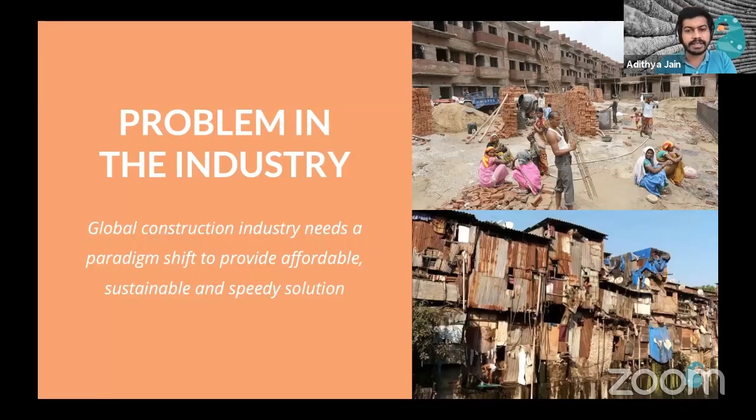So if you look at, let's say, the manufacturing sector versus the construction sector, I'll come to that. Manufacturing has gone way ahead of the construction sector in terms of what it is capable of delivering, but construction is far away from achieving that. And to specifically talk about India and the problem that we currently face in India, we have a housing shortage of 49 million houses, or 4.9 crores, and it is expected to expand, and I'm talking about the current projections right now. 100 million houses by 2030 is the projected requirement.

There is also a case where because of migration, that is, India is undergoing a very fast urbanization process, and because of that, people require a different home, or a home additional to whatever they have. So that demand is also going to hit the Indian housing market quite soon. And if you look at the global requirement, there is a requirement for 1.6 billion better housing for the people across the world. So these are not homeless people essentially, but these are people who require a better shelter than what they currently have.

And one of the biggest problems that the current construction industry has is with respect to the reliance on human skill. So we have a huge problem, and we have a very limited populace who have the skill to deliver the solution. And that is a huge problem. And there is massive wastage within the construction industry, and it is one of the biggest contributors to global warming as well. So there is not only a requirement to deliver housing, but there is a requirement to deliver it in a sustainable manner.

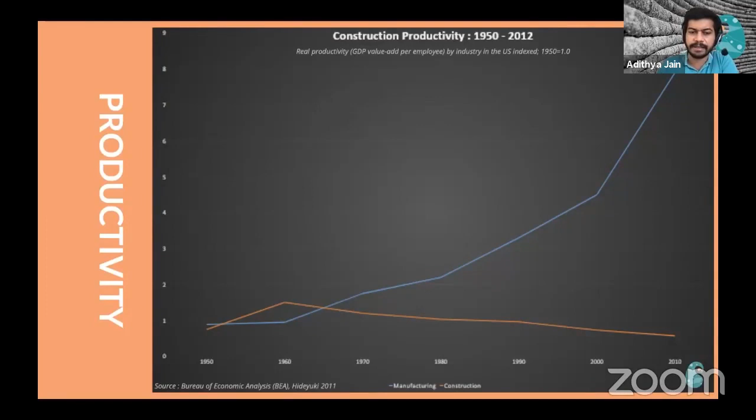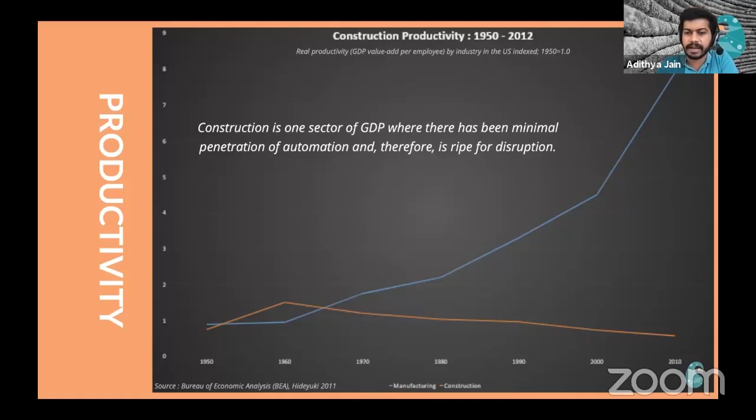So these are the problems that we are trying to resolve, and this is just a chart which is very self-explanatory. Just for the United States, the kind of difference that we see between 1960 and now with respect to productivity that has been achieved in manufacturing versus productivity that has been achieved in the construction sector is really massive. And this is what we aim to resolve through bringing digital construction solutions.

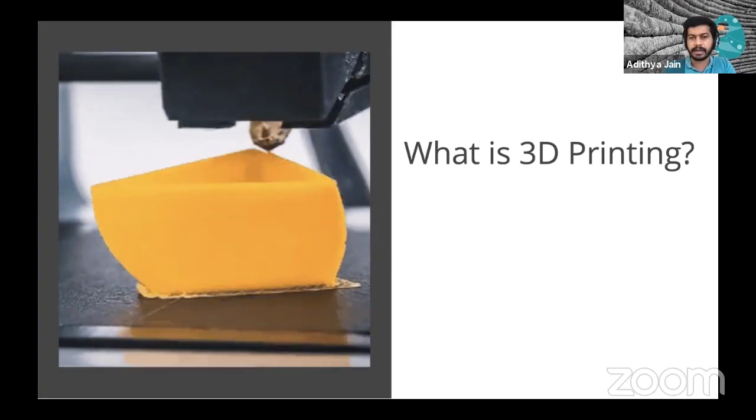So I want to start with the very basics, 3D printing, what it is, and what is the fundamental principle of this technology. 3D printing is a technology that has existed since about the 1980s onwards. Fundamentally, it is a technology where you deposit a material. It could be any material, polymer, concrete, soil. The material is deposited layer by layer on top of each other to create any specific shape. What you see here on the screen is a polymer material being deposited by a small 3D printer to create a basic shape. In formal parlance, that is in the scientific world, 3D printing is called additive manufacturing. And additive manufacturing essentially means add materials rather than subtract materials to create a component.

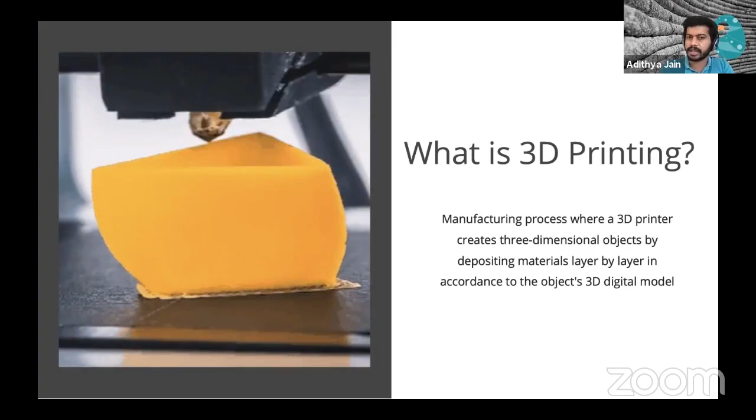The other aspect of 3D printing is it's a completely digital technology. It's a completely automated technology. So all we have to do is put a digital file into the 3D printer, and the printer can print the element for it. So I'll start with the basic requirements for enabling 3D printing. First, of course, is the machine, that is the 3D printer itself.

The type of 3D printer that is used really varies. People might be surprised to know that there are 27 to 35 different types of 3D printing technologies in the world. And what is essentially used for construction primarily is what is called extrusion 3D printing. Even within the construction space, there are a lot of variations in the technology that is used. So the machine could be very different depending on what type of 3D printing is actually being carried out.

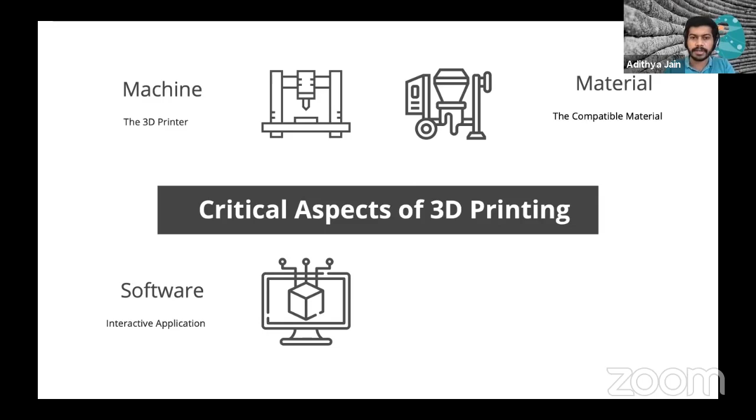Then you require a customized material. What you saw in the previous slide is a polymer material being 3D printed. Here in the construction industry, you have a variation of concrete or a geopolymer or even soil being used for large scale construction. So you require a compatible material for that particular application. Then you require the software. 3D printing, as I mentioned, is a completely digital technology, and hence you require a 3D file which has to be uploaded into the 3D printer for the process to take place.

So you require a software interface, and the software does a process called slicing, where the 3D file is taken, it is divided into, let's say, thousands of layers, and each layer is printed one by one. That is why it is called additive manufacturing, because we print each one of the layers one by one. And the last but very important process which makes this technology possible is the printing strategy.

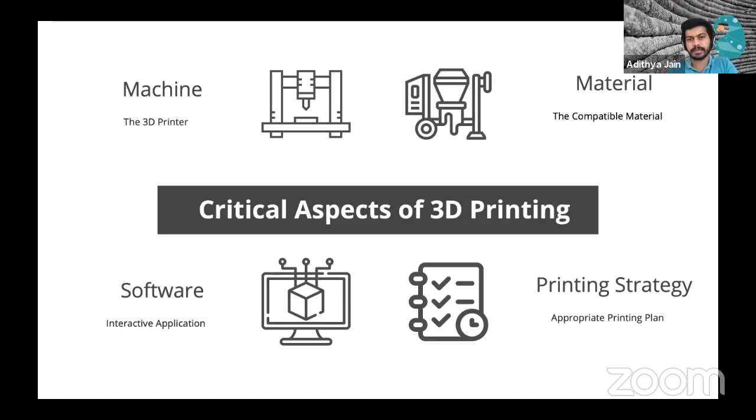For each and every application, we have to adopt a very different printing strategy. You might want a simple cup 3D printed using a polymer. That requires a very specific printing strategy, versus you might require a house 3D printed that requires a completely different approach. So these are the 4 elements that make up this technology matrix, and this is what makes 3D printing possible.

So I'll take you through the various processes that are involved in making, let's say, a house using a 3D printer. First you have to make a 3D model of the house, and there is a specific file format which is compatible for 3D printing. So you have to get the file in that particular file format, and then you have to upload that file into the 3D printer.

And then you have to make the concrete material available. So there is a specific type of concrete that we use for 3D printing within our solution. So not all types of concrete can be used. And people are also developing other types of material for 3D printing as well. Soil has been used in various places. There is also another material called geopolymer. So there are other material options, but primarily people use concrete.

And then you have the printing process where you 3D print either the elements or you directly 3D print the final structure on the construction site. So based on how that process is carried out, there are 2 different approaches. One is called off-site 3D printing, where you 3D print the elements of the house near a construction site and then transport the elements to the final construction site. And then you have on-site 3D printing, where you directly 3D print the structure on the final construction site.

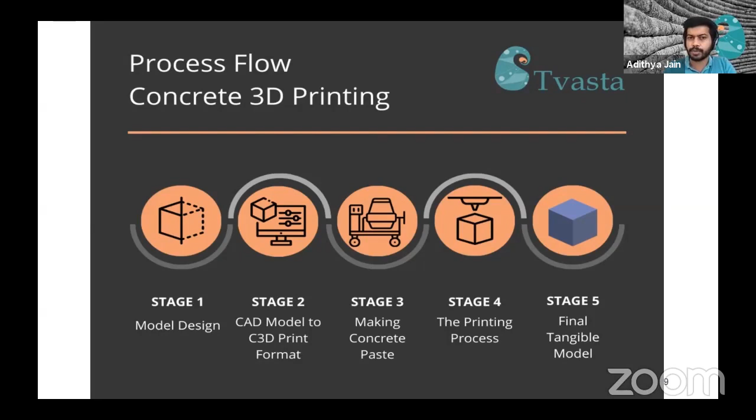And then you have the final structure, and you might have to undertake some finishing processes to get it into the shape you want. So what we do in this area is we develop the entire solution. We have developed the 3D printer, we have the material, we have the software, and we also have a printing strategy to enable 3D printing. So we develop the entire technology package. We sell 3D printers, and we also enable people to do 3D printing services using our machines. So we have started working in the affordable housing area. There are a few more applications of 3D printing.

And the real advantage of 3D printing, especially in the construction industry, is the level of customization that it offers. So every single house, especially in a country like India, is different from each other. It depends on the land plot. It depends on the user's requirement. It depends on the climate of that particular area. So normal construction technologies, or at least the construction technologies that have come up in the past few years, have not been able to customize it according to the user and according to the requirements. But with 3D printing, you can do that because all that you have to vary or change is the 3D file, and you can get a different output.

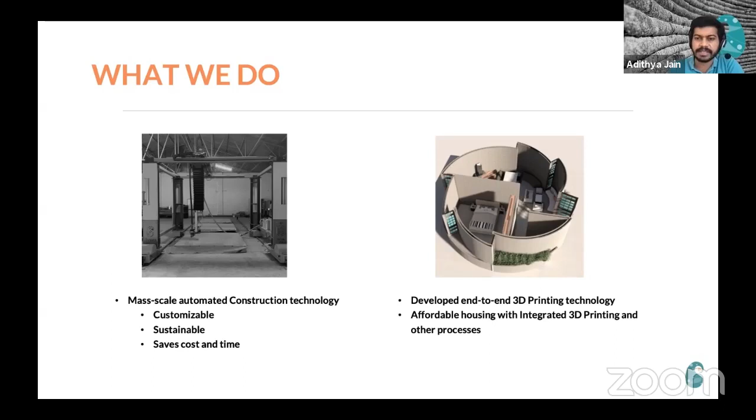And we have also been focusing on sustainability and time and cost. I'll get to that in a minute. But customizability is one of the key aspects of 3D printing. So we call this technology a mass customization enabler. So you had mass production until now after the Industrial Revolution, but with 3D printing, what we are really doing is mass customization. So affordability of the solution is a key problem that we are trying to solve. So we want to reduce costs of construction using 3D printing, and we want to do it not just for massive construction projects, but even when the project size is 1 house or 2 houses or 5 houses, etc. So affordability is a key parameter.

And we want to make our solution sustainable as well, because construction contributes to a very large degree towards global warming. And we do this by reducing the amount of material used. So concrete is material that is harmful to the environment. So we try to reduce the amount of concrete being used. And we also try to ensure that the house is designed in such a manner that it consumes much lesser energy than a conventional house over its lifetime. So that is a key aspect that we currently work on. Productivity of laborers who work using our 3D printing technology is a key aspect. We want to ensure that maximum construction happens with minimal involvement of people. So that's one of the key elements.

And another key delivery point that we have is to try and provide urban quality construction in rural areas. So if you have traveled across India, you would see that the quality of construction really drops beyond tier 3, tier 4 cities. And this is because one, the contractors in those areas are not trained enough to carry out construction in a particular manner. And also there are constraints with respect to financing. So with our technology, we want to enable it to go into rural areas, deliver construction in areas where even electricity is not available, and do it in a good quality sort of a setting. So that's something that we work on.

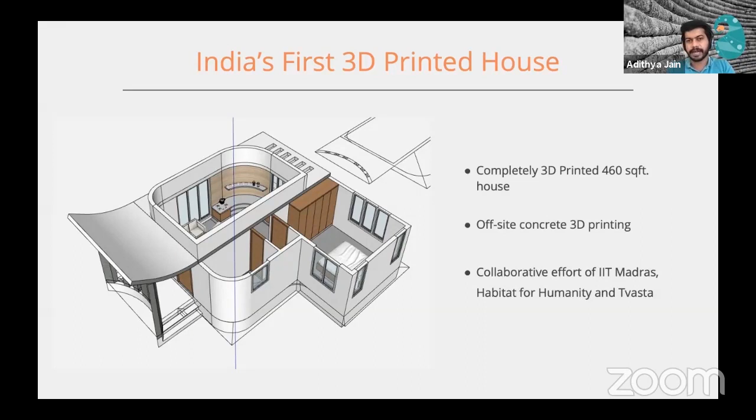This was done using a technology called offsite 3D printing. This is something where we have a 3D printer hosted near the construction site. We 3D print the elements and then bring the elements to the final construction site separately. And Habitat supported us through financing the project, and also we had support from IIT Madras to execute this. So I'll just show you a brief video of how this process actually happened.

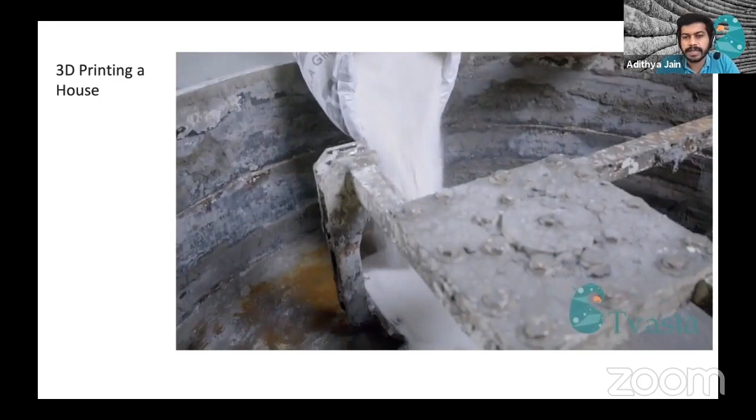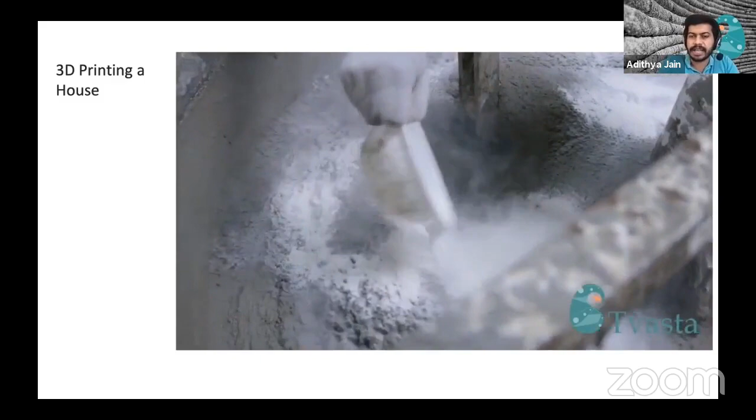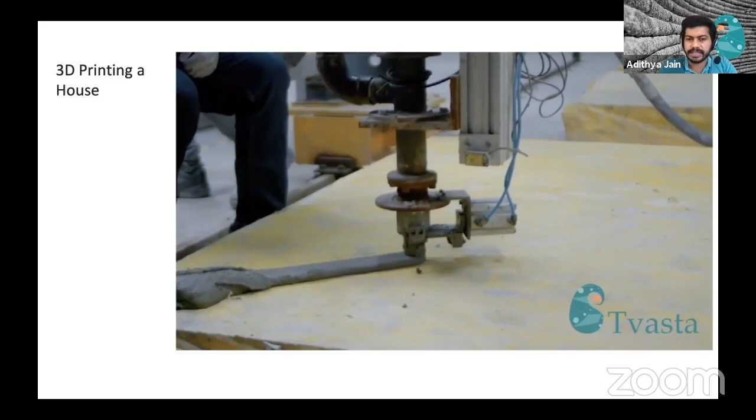So first we start with the material. So we currently batch manufacture the material. We don't produce more than 2 tons in a particular day. So this is a special type of concrete that we have developed. As I said, normal concrete cannot be used for construction 3D printing. So this particular type of concrete has several properties, such as when you see the concrete, you know that it's different from the concrete that you have normally observed.

This concrete can retain its shape without any support. So normal concrete, you might have seen, it flows like a liquid, and usually you require a mold to hold it in place. But this particular type of concrete, once it comes out of the 3D printer, it basically retains the shape in which it is deposited, so we can build on top of it.

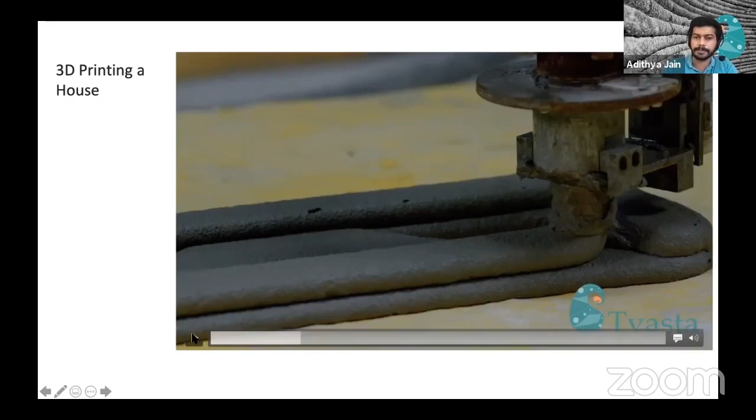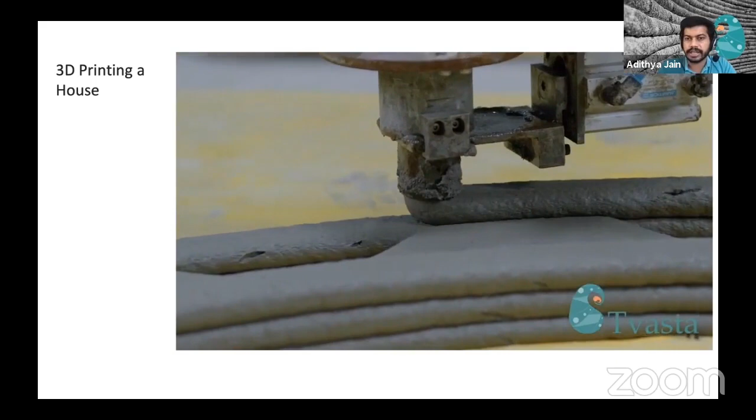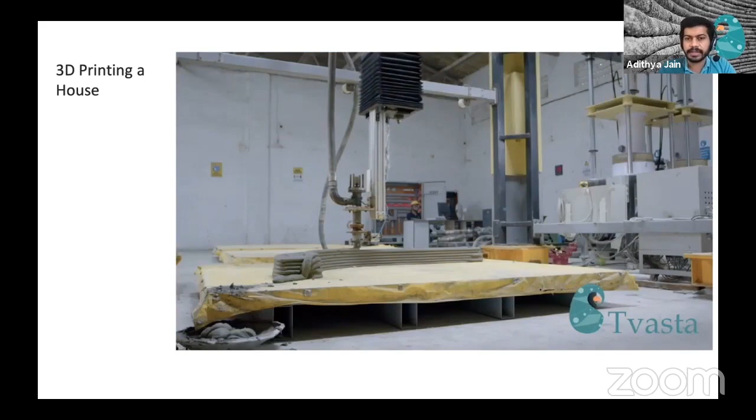So this is the 3D printing process. The design for this particular element or structure has already been fed into the 3D printer. So the 3D printer is going around depositing material in the shape that it has been asked to. So this is a very large scale 3D printer. You'll see an image right after this, just to give you a sense of proportion.

So you can see that we do not require 100% solid infill to 3D print a particular structure. We 3D print a wall element or a structure with much lesser material than what would be done for a conventional structure. So we save a lot of material, and also it becomes much easier to integrate plumbing elements, electrical conduits, sewage elements into the structure at a later point in time.

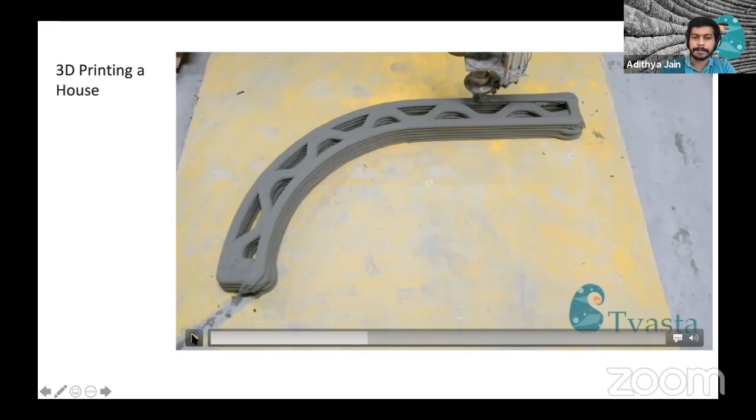So this is the large scale 3D printer, and this is the 3D printing process. You can see how big the 3D printer is in comparison with the people who are standing next to it. You might have seen 3D printers in laboratories or in prototyping shops, etc. Those are very small scale 3D printers. These 3D printers which are used for construction are very large and usually as big as a house or even bigger. And they work in a factory setting.

So if you have offsite 3D printing as we have now, here the 3D printer is hosted within a factory, and then you 3D print these elements, and then these elements are moved into the construction site. So the 3D printer here is a gantry type 3D printer, and hence it's bigger than the elements which are being built. You can also see that each of the elements that are being built are different in shape and size. So this, as I mentioned, is one of the key advantages of the 3D printing process.

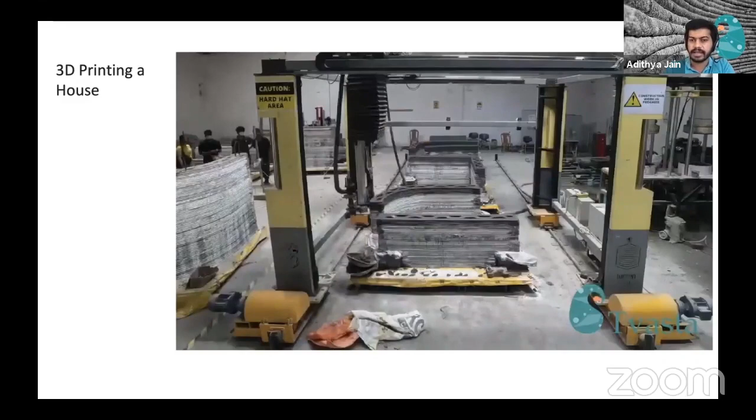We can customize the shape of the structure as and when necessary. So if we want to build a very unique structure, and most of the structures are unique in their own ways, it is very easy to do it using this process.

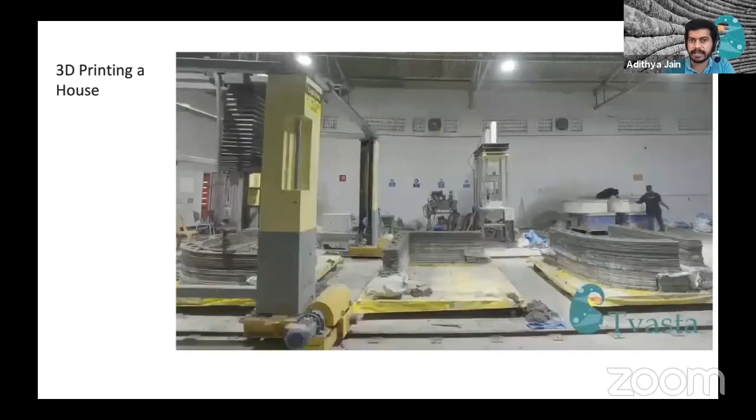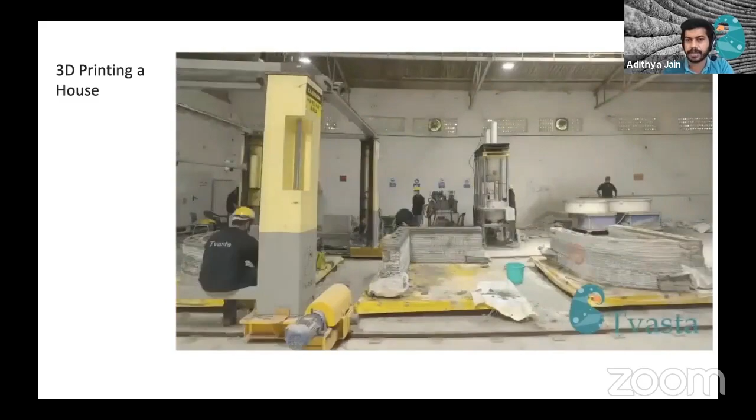So as I mentioned, we run it like a production shop. So the printing never stops, ideally. We run 2 shifts at this point of time, but we are planning to run 3 moving forward. So basically when one element is being printed, you have something else happening on the other element, and then you keep shuttling between these.

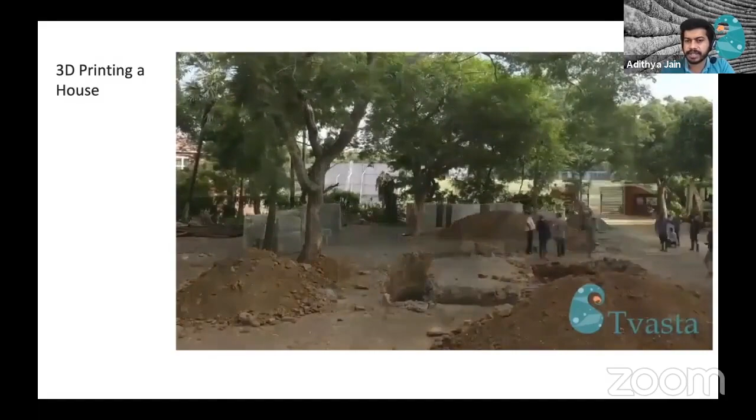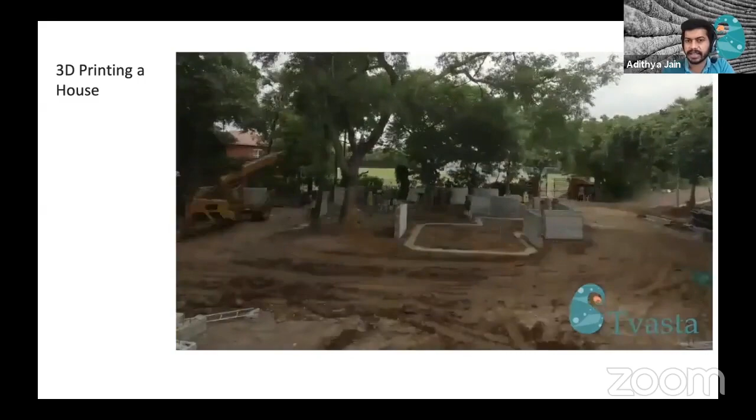So once all the elements have been printed, they are brought to the construction site. And for this particular project, we did not 3D print the foundation, but moving forward, that is something that is possible. The foundation, of course, depends on the type of soil and the construction site that you have, also on the structure that you want to build.

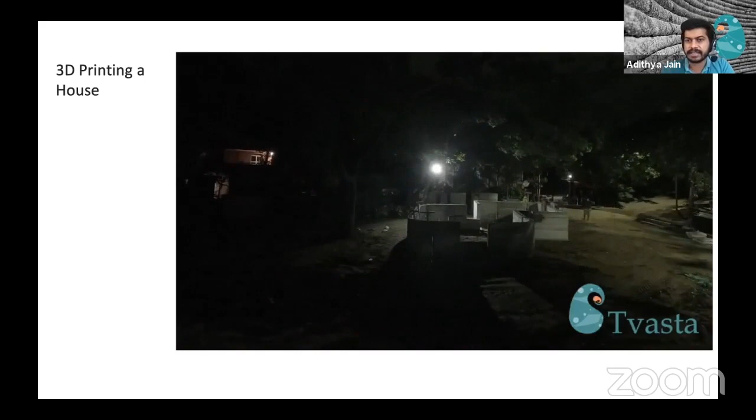Once the elements are printed, it takes a very limited period of time to actually get it assembled. So it takes us, at this point of time, 2 to 3 days to assemble the structure once everything has been printed.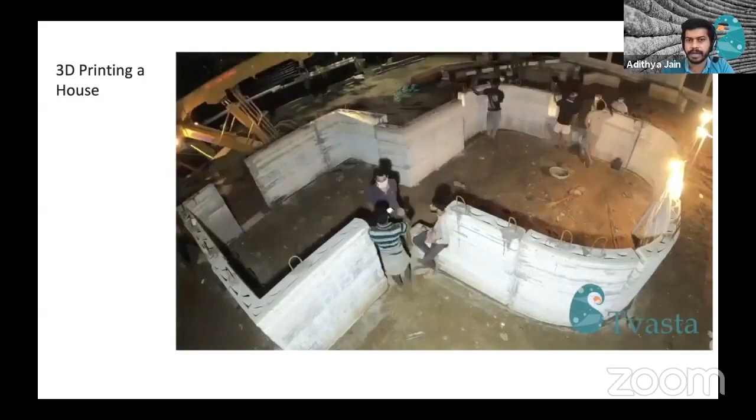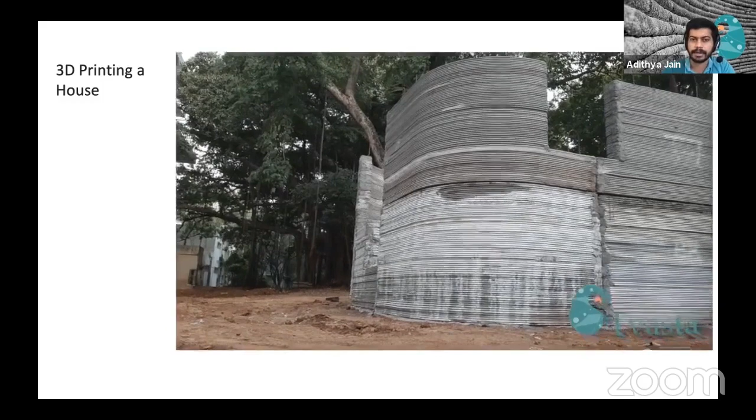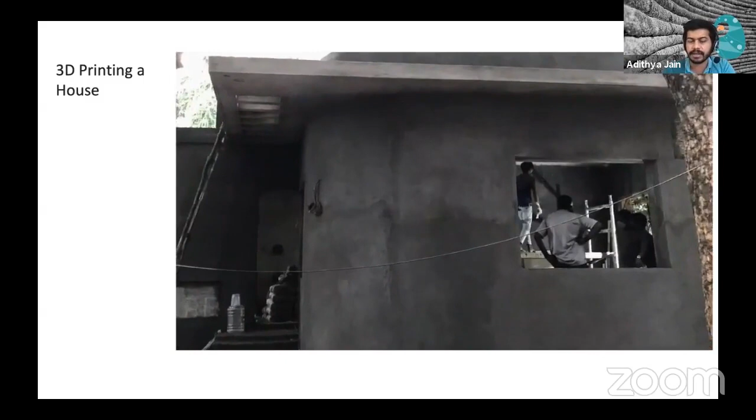And for this particular project, we took a little longer because we did it in the middle of COVID. So we had to sort of stop the process, and then we had restrictions to get into the place. So lockdown also happened. So we took a little bit of time, but currently we are capable of printing a structure like this within 5 days and assembling it within another 2 to 3 days. But moving forward, we want to print this entire structure within 3 days and then finish it within a week. So that's the target that we have set for ourselves.

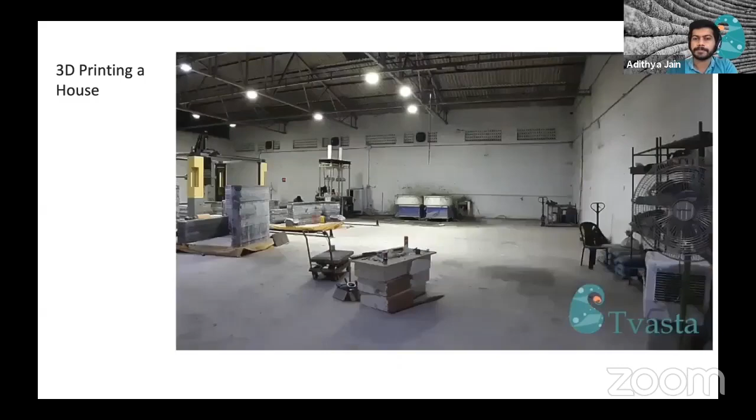So that's the finished house. So one of the key advantages of this is that the house which is printed does not feel or look different from a conventional house at all. It can look exactly like a conventional structure. So this is the final 3D printed house.

And one of the disadvantages of other construction technologies has been that the houses look and feel different from conventional so-called Pakka structures, because sometimes the materials used are such that the houses feel hollow. Sometimes when gypsum or other materials are used, the look and feel of the structure, especially in terms of the structural strength, feels different, although the quality might not be lower.

So consumer acceptance of a new construction technology is a very critical thing, and that's something that we have worked on. And it is critical because for most of the consumers, a house is the single largest asset that they will own in their lifetimes. And hence they want it to be strong, they want it to be perfect to the extent possible. And hence they are very touchy about it. And hence we have tried to put a lot of effort to ensure that a 3D printed house looks exactly like a conventionally built house.

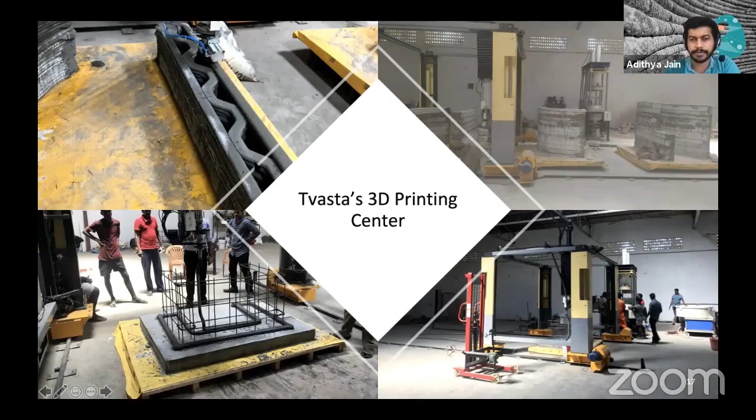So these are a few images during the construction process. We integrate reinforcements into the 3D printed house. So that's also possible. We can do it either before the 3D printing process begins or after the 3D printing process ends. As you can see, there are spaces available within the 3D printed structure to insert reinforcements. And the shapes of the various structures can be different, as I mentioned. So these are images of the 3D printer which we use.

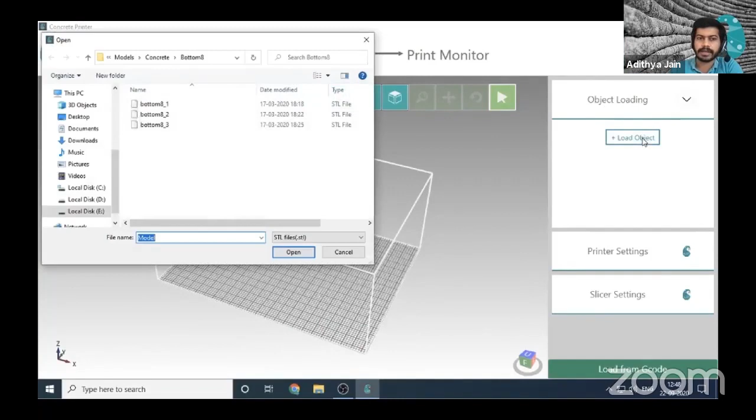So I just wanted to give you also a sneak peek into the software that we use for 3D printing. So this is a software that we have developed ourselves. So I'll just quickly run you through it. So essentially, this software can accept what are called STL files. So these are standard files within the design space. And once these files are loaded, they can be manipulated within the software itself. The fundamental aspect of this software manipulation to enable 3D printing is a process called slicing. So we'll do that after we set some process parameters for the printing process.

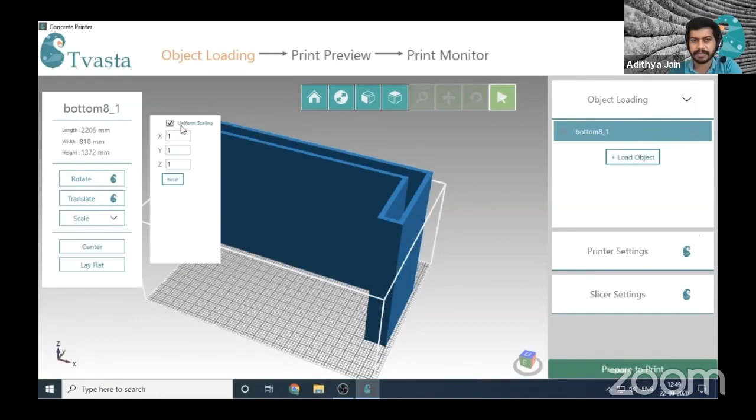So as you can see, everything is digitized. We can scale the 3D model very quickly, move it and arrange the orientation of the printing process. So that's why we call it a completely digital process. And then we have the slicing process which is being done. So slicing essentially is just taking the 3D model, converting it to 150 layers or something of that sort. Then we get an exact estimate of how many kilograms of concrete will be used for the process, because it's completely controlled by the software.

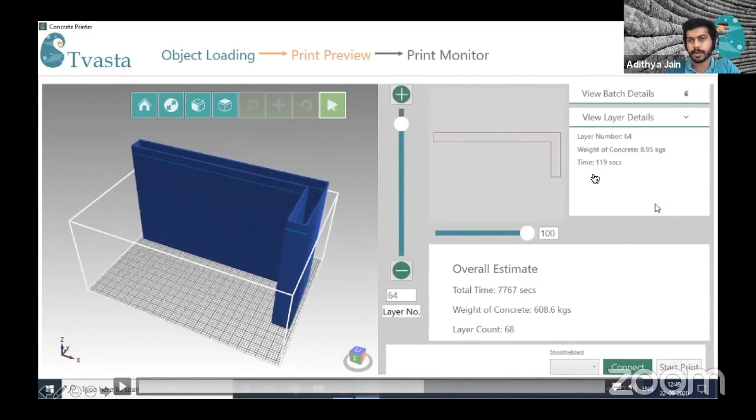So just to give you a sneak peek here, we know that for this element, because of the layer height that we have set and because of the orientation, size, etc., we have 68 layers which are going to be printed. We know that the amount of concrete required is 608 kilograms. So we need to only pump in the exact amount. And the time required is mentioned, but I think here the scale might be slightly different. It will take much more time to print it. Okay, sorry. So I think that was the time required for one layer. So the time required is also mentioned here.

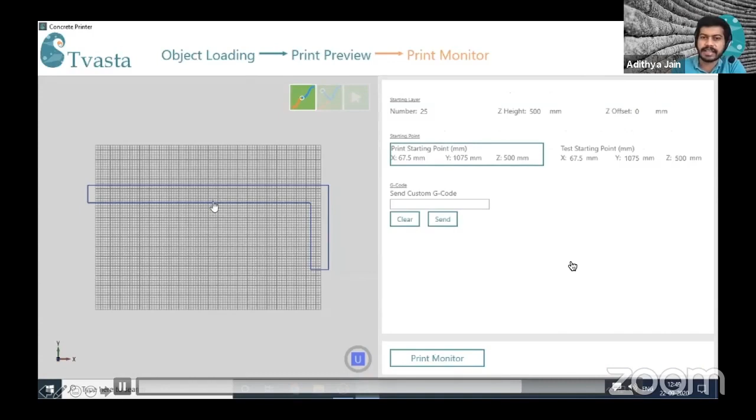But I think, yeah, the printing speed might have been slightly different. So that might not have been completely accurate. But basically you can understand that you get all the parameters required for the operation here.

And essentially the software manages the entire printing process. You require just one person to run the software and one person to handle the material. So that's all that is required to run the entire printing process.

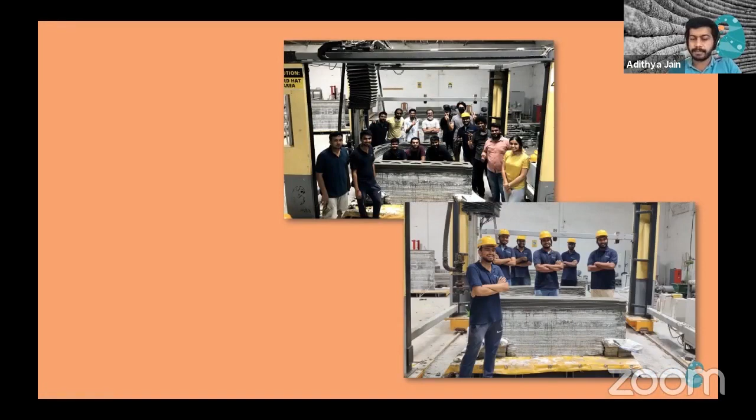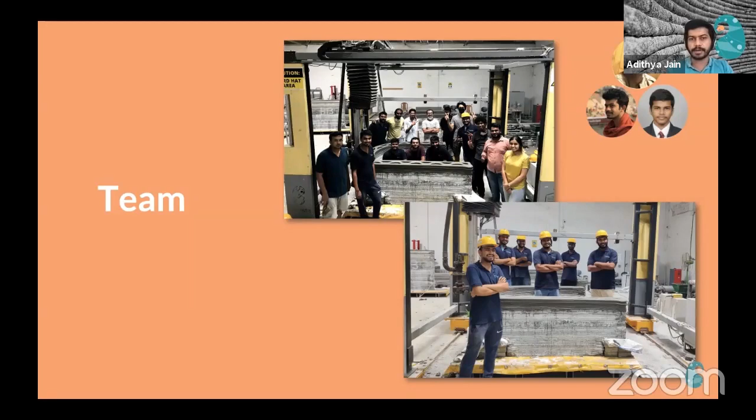So this entire team, we currently have about 17 people and it's a very young team. So we have developed this entire technology here in India. The printers are manufactured in Bangalore. We currently do the printing operations out of Chennai. And the material also has been developed in collaboration with IIT Madras and a couple of other research partners.

So what we are working towards in the future is a few things that will enable us to target multiple markets, both in the urban and rural spaces. One key element, of course, is printing multi-story structures. We are currently working on a project which is G+1, and

Adithya, looks like your screen is frozen. We are not able to hear you. I think Meera, his computer is switched off, it looks like. I think he's joining back. Hi Adithya, you're back. Sorry, just a moment. Hope you can see my screen. Yes, we can.

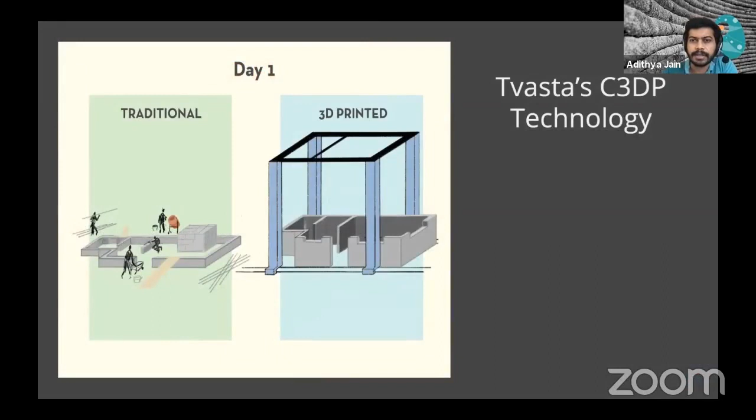So yeah, just to give you a few facts and figures, for the current 3D printed house, we took a little while longer because it was done during COVID, and also we have made some strides in innovation after we finished that. But currently we can 3D print that 500 square feet in about 5 days, with 2 shifts running. We are working hard to ensure that we can run 3 shifts of 8 hours each, but currently we are not able to do that. But as I mentioned, this house took us about 21 days to print.

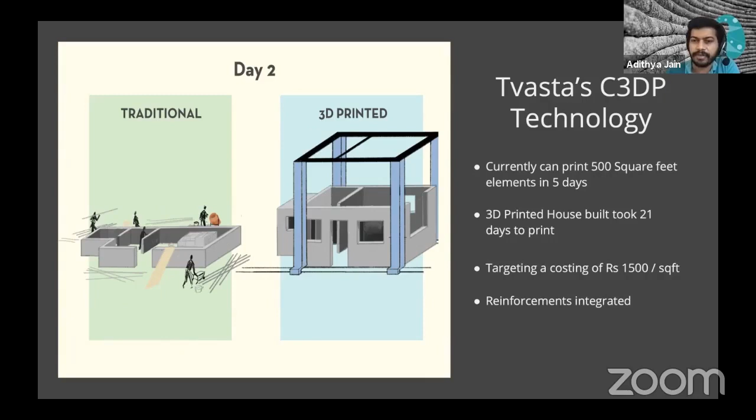And we are currently targeting a costing of 1,500 rupees per square feet in a uniform manner across various types of housing. It is very difficult to give a standard price for constructing a particular house. It depends on whether it's a multi-story structure, whether the roof and the foundation elements are shared between various units, whether it's a single independent house, so there are multiple elements to it. So taking an average house, we are targeting a cost of 1,500 rupees per square feet.

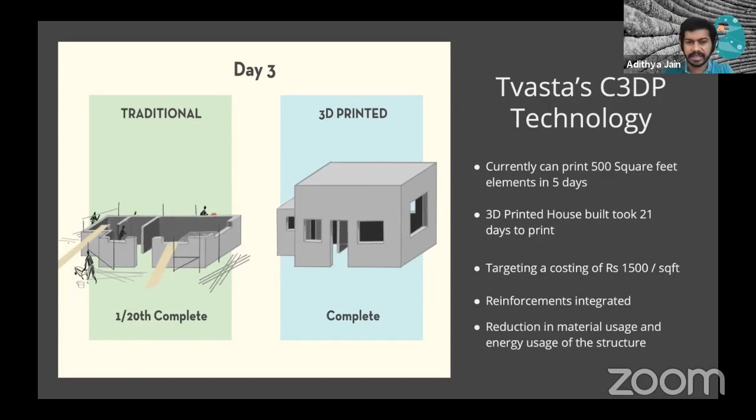And we are working on integrating reinforcements during the printing process itself. And one of the other key aspects that we have already been able to achieve, but we want to push further, is our materials. We have been trying to make the materials very affordable for the Indian market and reduce the amount of material used within the structure as well, so that costs are minimized.

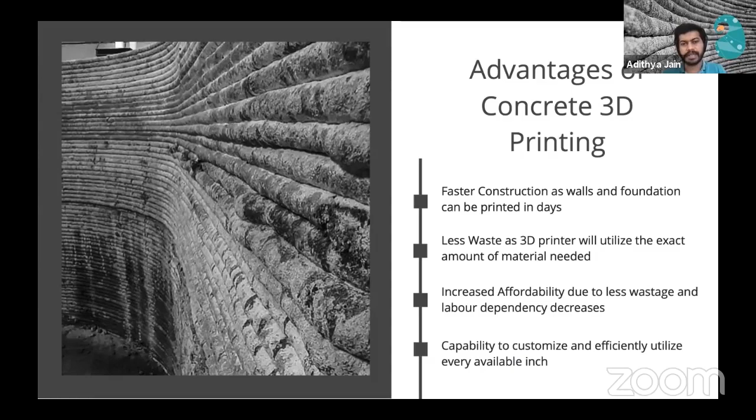So the fundamental advantages of the 3D printing process compared to conventional construction: one is the faster construction process, of course. Second is the reduction of waste. And faster construction can also reduce the man hours spent on building a structure, bringing down the cost. The capability to customize, as I mentioned, is a very key advantage, because especially in a country like India where land is scarcely available, we require customization even for very small projects.

So a few other aspects that we are working on, especially for the rural markets, is off-the-grid 3D printing. We have made the 3D printer completely independent of the electricity grid by enabling it to run on other power sources. Currently it's a diesel generator. We are trying to see if other power sources work. This will enable us to go into rural areas where power might be intermittently available or difficult to arrange at a particular site, and then enable 3D printing. And we want to provide urban quality construction by standardizing the process to a very large degree.

As I mentioned, once we make 3D printing a standardized process, cost transparency can be achieved because we do the construction over a very short period of time. Cost overruns are minimized. And also, once the process is automated to a very large degree, we know exactly how to estimate for a particular project. So that's also something that can enable cheaper financing of a project.

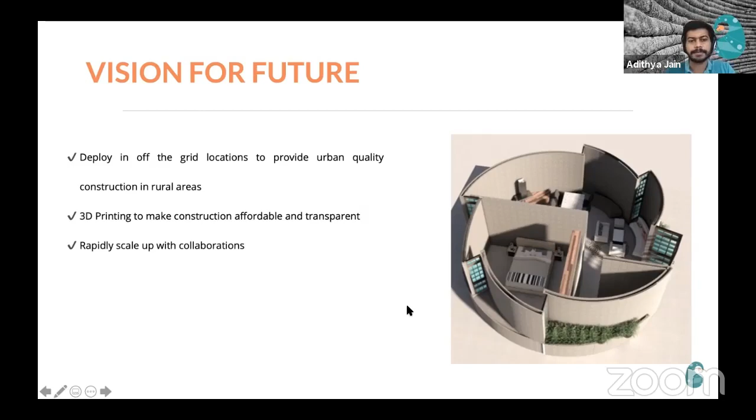Yeah, so we're also working on building an ecosystem of partners who can enable us to scale. So that's something that we currently have at this point of time. So I'll be happy to take any questions. And Meera ma'am, if you want to add anything.

No, that was wonderful. I think that laid out a lot of detail on the process, starting from the first principles of what is 3D printing. So thank you so much, Aditya, for the detailed technical explanation, which was quite palatable for everyone. I certainly learned a lot more things today. There are lots of questions, so I will jump right in. Sure. So some of the answers you had covered because they came in a little early.

One was, can you build a multi-story home, particularly in the context of cities like Mumbai, where there is a lot more congestion and you need a more vertical solution? Right. Yes. So multi-story structures are certainly possible. It's a matter of execution at this point of time. So as I mentioned, there are different types of 3D printing technologies. With off-site 3D printing, multi-story constructions are directly possible at this point in time. And we are currently doing a project which is multi-story in that sense.

But with on-site 3D printing, we currently have a limitation because the 3D printer is physically on-site. And hence, if we are using a gantry type 3D printer, which is the type of 3D printer that people might have seen in the presentation, then the 3D printer limits the size of the structure that can be built. So we are only planning to go up to G+3 using a gantry type 3D printer.